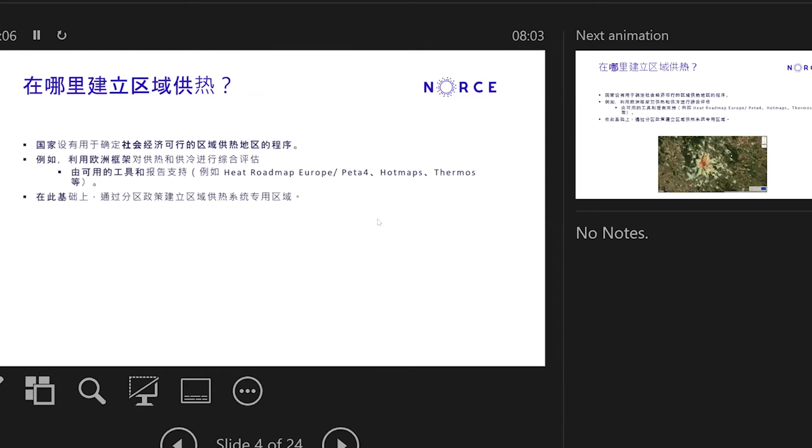So where should we have district heating? I think it's important to establish already in a national procedure the overall purpose of district heating. If you take the Danish experience as a point of departure, it's quite clear that it's based on a principle of socioeconomic viability.

What you can do is establish some sort of national or regional procedure where you start to map and identify the areas where the potential for district heating exists. An important parameter here is the heat demand and heat density, or what we also call linear heat density. Within the last maybe 10 years, different tools have been developed in Europe and Denmark that are able to do this.

I'm sure this has also maybe already been developed in China, or can be developed, where you have IT tools that map the heat demand, and thereby identify the areas with good potential for district heating—meaning urban areas where people live close together, giving you a high linear heat density.

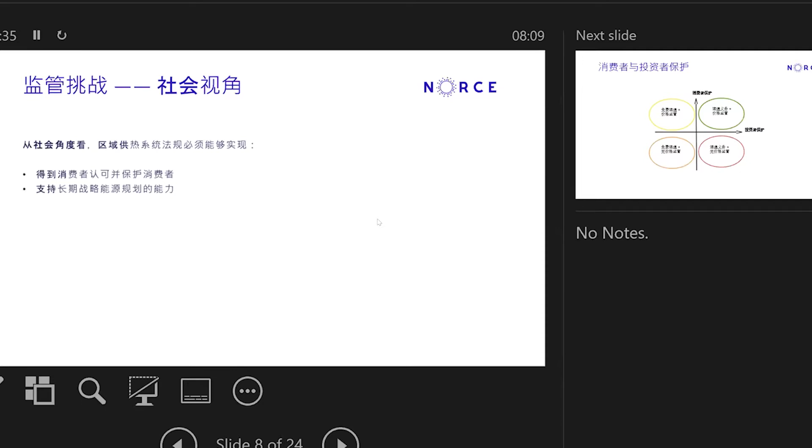So in a way, you can say we have two challenges, or two concerns to balance. On the one hand, consumer acceptance, and on the other hand, investor protection. The investor needs to know his investment is viable, so he needs some certainty about the demand and the willingness of people to connect to the system. And on the other hand, you have the consumers who should not be, you could say, victims of this monopoly.

For example, in Europe we have seen examples where monopolies increase the prices too much because they have this monopoly power. One way this can be balanced, as has happened in Denmark, is to place yourself in this top right corner of the regulation, where on the one hand you establish an obligation to connect within the district heating areas. This means that households in these areas should be connected to district heating.

By this, you protect the investor and make sure the investment is viable, because it secures the demand. But by this, of course, you create this strong monopoly. So on the other hand, to balance this, it is important to have an effective and strong price control, and also, as I will address later, some ownership structures that enable this control of the company.

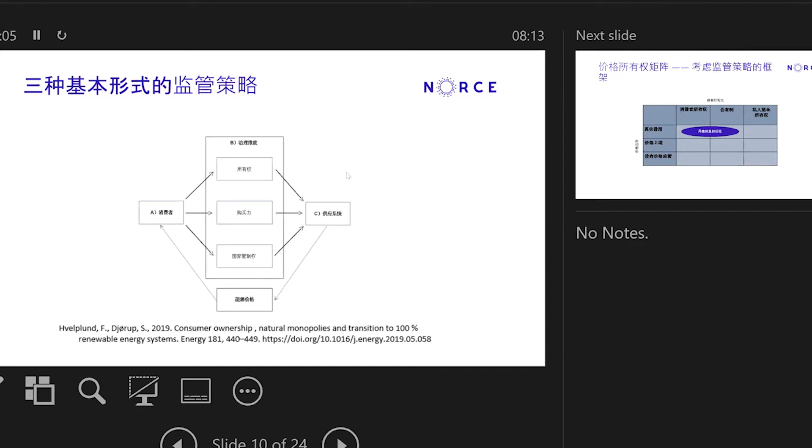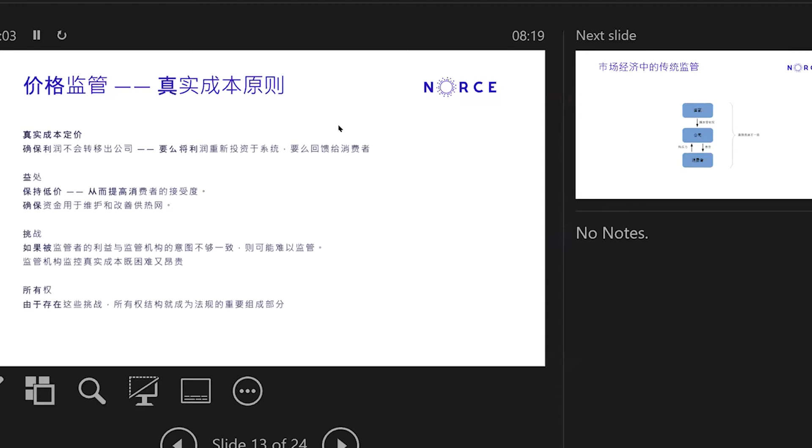This kind of basic challenge that we see across different price regulation leads to the question of ownership. The interesting part about ownership is that by changing ownership structures, you also change interest and incentives, aligning the interest between different parties in society.

So in a normal market economy, you have this conflict of interest, but this is then controlled. The company is controlled partly by state regulation and also by the consumer's buying power, meaning the consumers have a free choice. If they think the price is too high, they can choose another option, and thereby they have some sort of buying power or market control over the company.

The problem with district heating and the monopoly situation is that this consumer buying power is disabled, because we have a monopoly situation, and that's why this principle doesn't really work.

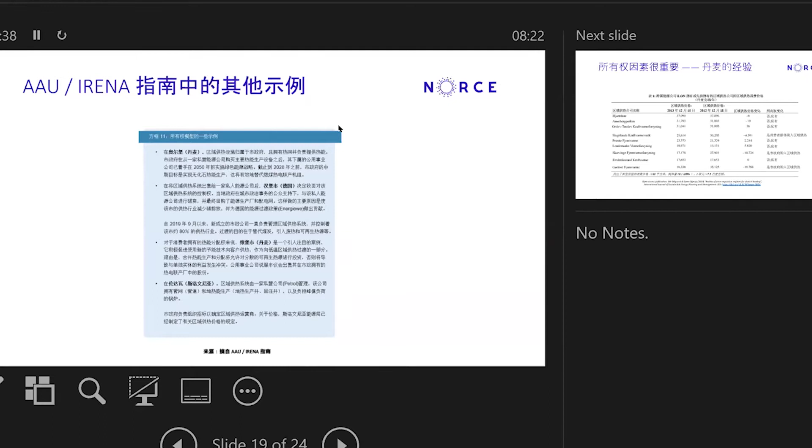What we then saw was that when this ownership was changed, either to municipal ownership or to consumer ownership, we saw an immediate effect on prices and large efficiency gains.

This indicates the same thing I said before from a theoretical angle, that it is difficult to have price regulation if you have a company that's not willing to collaborate, because the company has the real information about the true cost of its operation. So in the Danish case, it's been difficult for the regulatory power to control the prices if the company is not willing to collaborate.

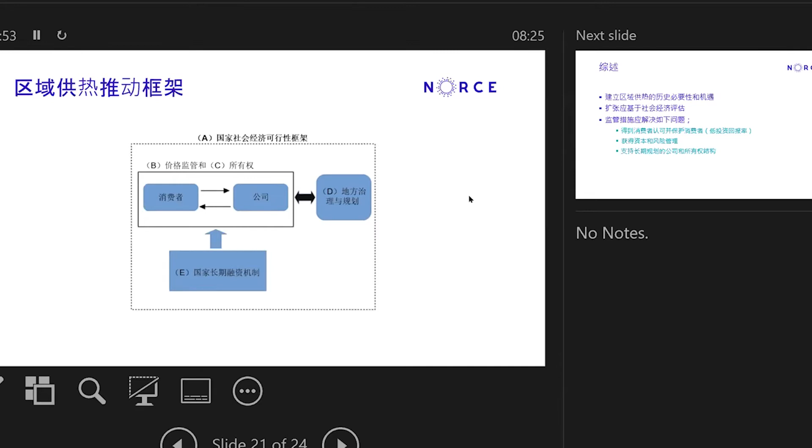So to sum up, you can say that the opportunity and potential of district heating in these years is very high, and it's important that district heating has a societal purpose, a societal aim. When implementing it, what is important is to control the monopoly, to make sure that you have a company that's willing to collaborate. That was the final slide from my side. Thank you.

Next, please, Viviana. As I said, the treaty operates based on the EU acquis. When it comes to heating and cooling, the EU acquis currently in place in the EU and the Energy Community integrates the Energy Efficiency Directive, the Renewable Energy Directive, the Governance Regulation from the Clean Energy Package, and also the big picture strategy on energy system integration.

Sometimes there is a time lag between the acquis in force in the EU and the adoption of the acquis in the Energy Community, but not more than maybe 2 years. So in the EU now, you have an amended Energy Efficiency Directive with a clear target of energy efficiency by 2030. In the Energy Community, we are yet to adopt that, but we still operate under the 2020 target.

For that, it's important to remember the district heating and heating and cooling obligation under that directive. I'll speak about it in more detail in the next slide, but for now, let's stay on the bigger picture.

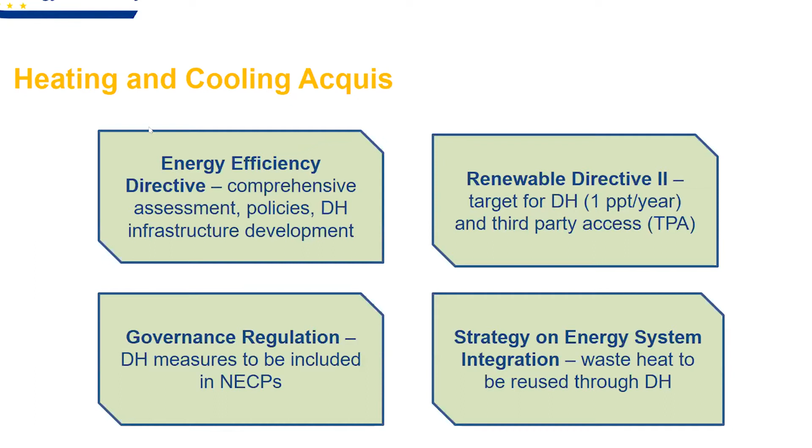I think Soren already brought in some of the obligations from the Energy Efficiency Directive when it regards heating and cooling. This is interesting because, as any directive, it has to be transposed into national legislation. So the directive prescribes the big picture, but each country should transpose it, taking into account the national context.

Nevertheless, the directive itself requires that each country prepares a comprehensive assessment of the potential for the application of high-efficiency cogeneration — high efficiency, I'm stressing that — and efficient district heating and cooling. There are annexes which define the high-efficiency indicators, and district heating and cooling is described as integrated renewables and waste in the system itself, so it also looks at supply and transportation.

It also requires that countries adopt policies to encourage, taking into account at local and national or regional level, the potential. You remember Soren said you have to do this mapping of where you have more potential. Wherever you have this potential, whenever there's a new residential or industrial development, you have to make a cost-benefit analysis of whether you could supply heating and cooling through either a cogeneration plant or an efficient heating and cooling system.

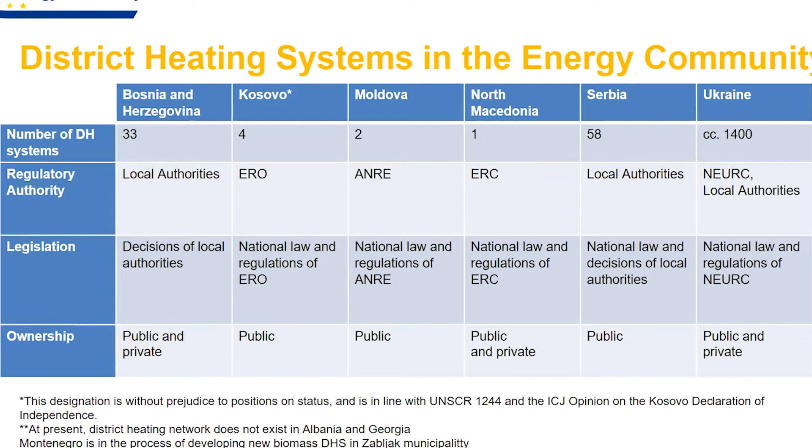I will just mention the example of Bosnia and Herzegovina, where in recent years they have developed biomass-based district heating companies in the form of public-private partnerships.

Some of the common characteristics of district heating systems in the energy community are that district heating is regarded as a service of public interest, and that it is provided by vertically integrated undertakings, meaning that production, distribution, and supply are merged in one company. The exception is North Macedonia, where there is an obligation to separate these activities into different companies. Basically, we can say that there is no competition in district heating in the energy community contracting parties.

What is also one of the common characteristics, and is maybe probably the biggest problem for the development and investments in district heating, is that tariffs are regulated and they do not reflect the true costs of production or these activities. I would also say that energy community contracting parties do not have pricing of CO2 emissions. This is expected to come to our contracting parties this year or next, in the upcoming period, and this will have to bring much higher prices.

Now I'm moving to the means of how to integrate renewables and waste heat in district heating companies. Basically, either district heating companies develop by themselves, or third parties independently produce heat from renewable sources and have the right to inject this heat into the distribution network. This is the so-called third-party access.

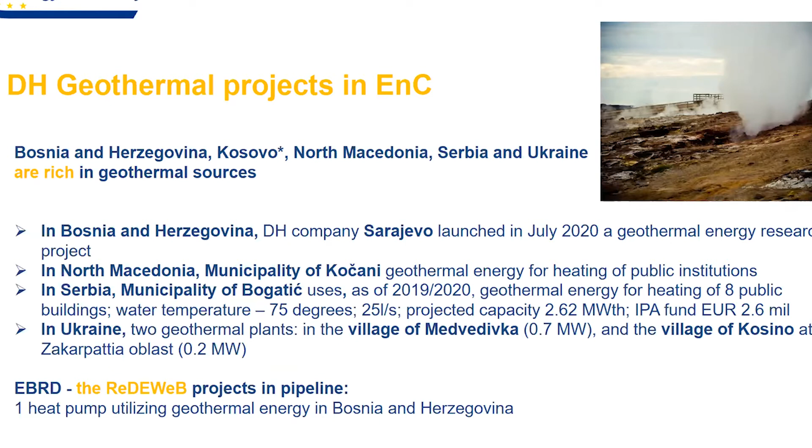We have good cooperation with EBRD, which has a separate program for renewable district heating and district energy for the Western Balkans, and there are numerous projects in the pipeline that should develop geothermal and solar thermal projects.

Now the second means of introducing renewable heat and waste heat into district heating: third-party access, where third parties produce renewable heat and have the right to inject it into the district heating network.

Since in our contracting parties there are no practical examples of this, I will shortly tell you about some theoretical models. In the single buyer model, the district heating company purchases renewable heat from a third party and remains the only supplier to consumers. In the network access model, the district heating company does not purchase this heat, and the third party is at the same time the supplier.

As far as I am aware, there are no practical examples of this second model either in European Union member states or in contracting parties. Regarding whether district heating companies have to provide this access: third-party access can be voluntary or mandatory, and depending on whether predefined rules exist in the regulation of a country, it can be regulated or negotiated, meaning the district heating company has freedom to negotiate with the third party on terms and conditions of access.

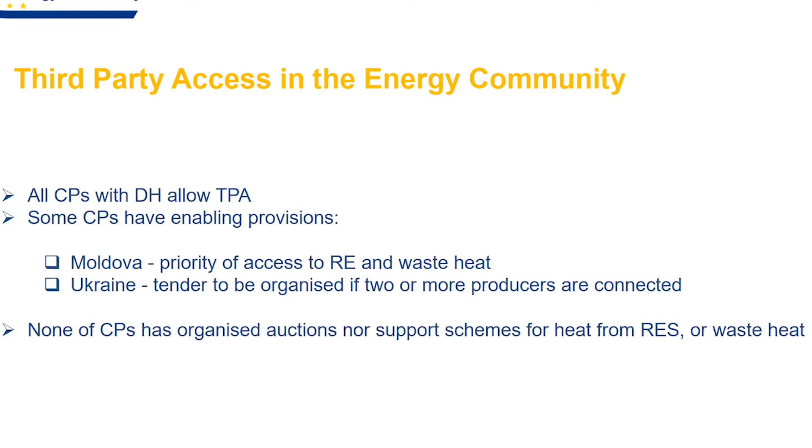Concerning third-party access in the energy community, all contracting parties have allowed third-party access, which is good and important. Some have enabling provisions—Moldova legislation gives priority of access to renewable and waste heat, and Ukraine's law on heat supply says a tender needs to be organized if two or more producers are connected to the distribution network. However, none of our contracting parties really organize auctions for renewable heat, or have a support scheme at the national or local level for heat produced from renewable and waste heat.

Some conclusions: integration of renewable and waste heat in district heating companies is in an early phase. In the upcoming period we expect to work a lot on defining national policy, but also to support local authorities. As Violeta said before, everything starts with a comprehensive assessment to see where the potential for district heating is and where we can build this infrastructure.

We support the solution that independent bodies, equipped with necessary knowledge, actually regulate and monitor district heating rather than local authorities. Human capacity is usually lacking, so technical assistance is needed for local and national authorities to define this enabling framework, define support schemes, and organize auctions for renewable and waste heat. Thank you for your attention. I hope I didn't take too much time.

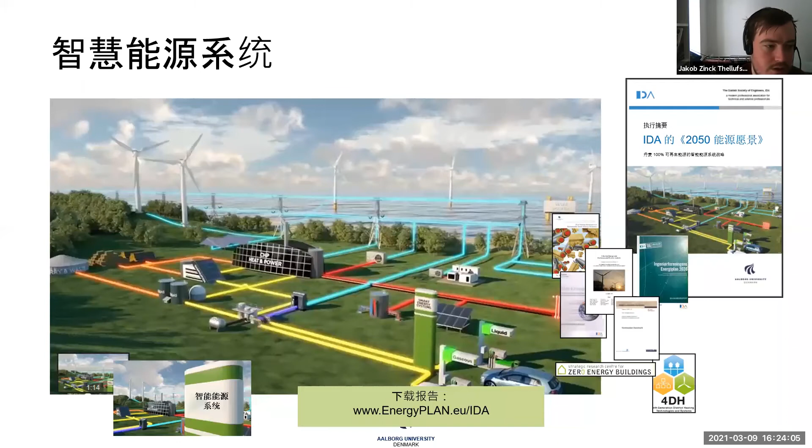My agenda: I'll talk a little about the current status of district heating and its generations, then move into low temperature district heating, the technical aspects, and why it's a good idea to move towards low energy. Then I'll show an example, a case from Denmark, though the key concepts can be applied anywhere in the world and can be very beneficial.

This is mostly about Europe, where there's a lot of district heating in many countries, but also many countries without it. It also applies to China, which has a lot of district heating in certain areas, while in others, due to climate or other factors, there's little or none. There are different consequences depending on when the heating season is, and whether heating also supplies domestic hot water or that has to be made separately.

All these things play together. First, there's a challenge not only to develop district heating, but in some countries a challenge to build out completely new district heating areas. This could also be the case in Asia, where some areas may need to expand with district heating.

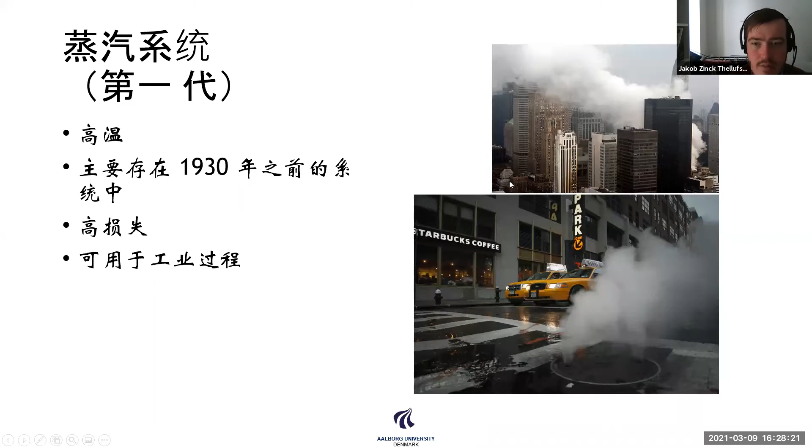Then the second generation, built around the 1930s to the 1980s, is also still operating in many places in the world. Here we now have high pressure - pressurized water running around with over 100 degrees in our system. But again, we're talking about high temperatures, and you also have to pressurize the water, so we have some efficiency losses in such a second generation system. In many Eastern European countries or Russia, this has been a common solution for handling district heating.

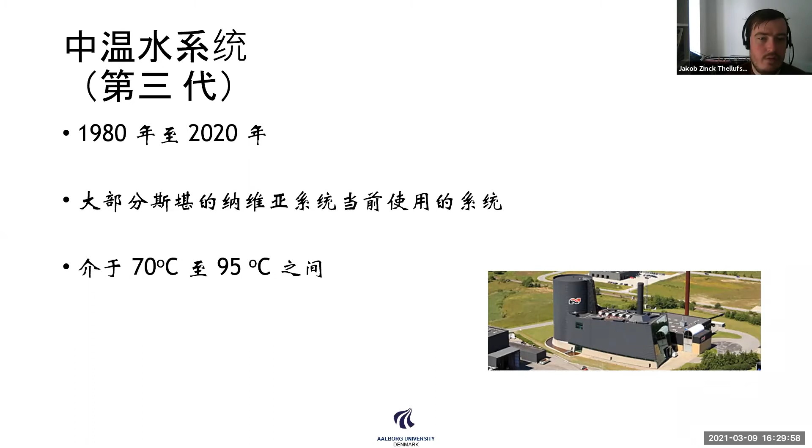But what we need to do - for some it might be moving to third generation, but overall for everyone, I'd say what we need to do is move towards fourth generation district heating. By going to fourth generation, we're lowering supply and return temperature - that's some of the key things - and increasing energy efficiency. So we need to lower supply, lower return temperature. By doing that, we gain multiple benefits. First, we gain less loss in our system - we reduce our losses.

Second, we get a number of new supply technologies we can potentially use. When we look at the first two generations, the only option was really thermal plants, boilers, power plants, combined heat and power plants delivering heat into our system, because we needed to deliver it at such high temperature. By reducing the temperature, in a third generation system we got the option to have surplus heating from industry, maybe CHP from biomass, and solar heating. So we opened up options by lowering the temperature. Now, if we can lower it even more, we can utilize heat pumps, geothermal heat, and excess heat from supermarkets, low-grade industry, or data centers.

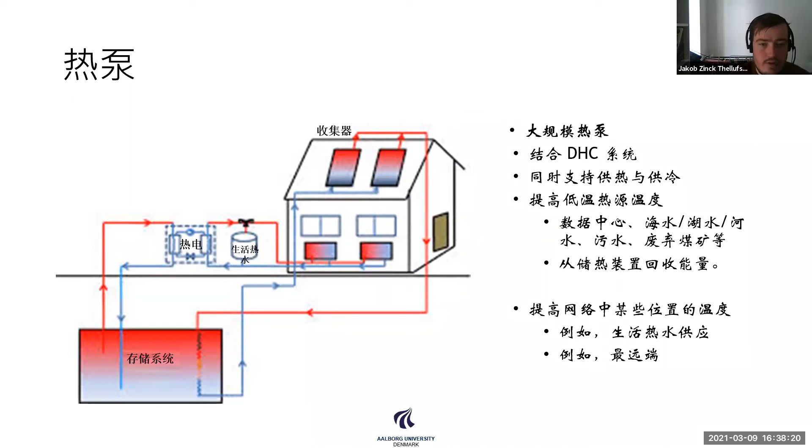Else, when we talk about renewables in our grid, we talk about technology like geothermal, where we can find hot sources in the underground that we can include into our heating system, either directly if we're lucky and the temperature close to the surface is high enough, or like in many other project examples right now, using heat pumps. So the geothermal source will be the medium for boosting the temperature up, as will happen in a heat pump.

Another option for renewable that's very obvious is using the sun. So instead of using solar PV to create electricity, we can also introduce solar thermal, where we have solar panels that capture heat from the sun and use that to heat our heating system. This is also relevant in countries where it might be cold — these examples here are from Denmark, and they are actually operating very well in a Danish context, and we are not necessarily the warmest or most sunny country in the world. So there are actually some good options for this globally as well.

Now, when we have our renewables, we can use a bunch of different thermal storages. And all of these, with low or lower temperature, can use these kinds of seasonal storages. So while we get all these different renewable sources into our system — geothermal, solar, waste heat from industry, excess heat from the supermarket — all of this can be stored seasonally, because a lot of these things happen when we have a lot of sun in the summer, or a lot of excess heat from industry in the summer, but we don't have the demand because it's too warm, so it's not cold enough for us to have heating demands.

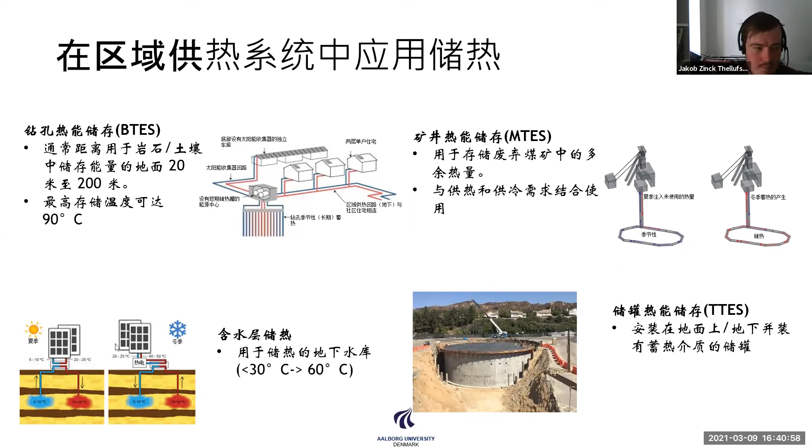So to show and illustrate these kinds of technologies in the system, I would like to talk here at the end about a plan for 4th generation district heating in Denmark, in the city of Aalborg, that we've been working on about a year ago. We try to estimate how we can actually use 4th generation district heating, and what the advantages are of doing this in terms of technologies and all things considered.

Currently, the Aalborg system is the 3rd generation district heating, and it looks something like this. It is very much coal based. We are supplying by a big central coal power station, and this also delivers a lot of heating to industry, and then we have a lot of heating that this CHP plant delivers, and the main heating comes from this, and excess heat mainly from industry. So this is the current system in Aalborg.

And what we want to do is transition this into renewable energy. So we limited biomass use. We included transport, both local and global, and we use the industrial demand related to inhabitants. This is because Aalborg has a very big cement industry, with potential for a lot of excess heat that we will use in the plant, but it also has a lot of coal and fuel consumption. If Aalborg had to consider this, the only thing we would have to do in the plan was basically transitioning this plant.

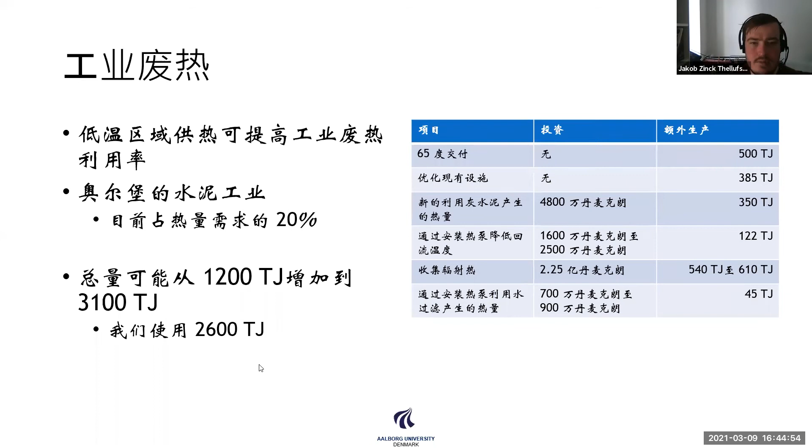And this potential, some of it will already be available today. We don't necessarily have to build 4th generation district heating to get to all of it. Then we made an analysis and said, well, around 2,600 terajoules is accessible for the system. So this is what we will use in the analysis.

Finally, we have heat pumps and geothermal, and here we estimate 100 megawatts. These can either be supplied by geothermal or seawater, because there's a river close to Aalborg. And we have 20 megawatts of heat pumps running on this waste heat from industry, helping to boost the temperature a little bit. And we have a 40 gigawatt hour seasonal storage in our system.

And this means that our district heating supply changes from being predominantly based on the CHP, the combined heat and power plant, and instead goes into being predominantly produced by waste heat, waste incineration, and heat pumps. So those are the main technologies now supplying our future system based on 4th generation. We are actually almost completely free of CHP, and completely free of coal in our system, which not only benefits the CO2 emissions, but also benefits a lot the particle matter and the air pollution potentially. So we are also dealing with those things in the same manner.

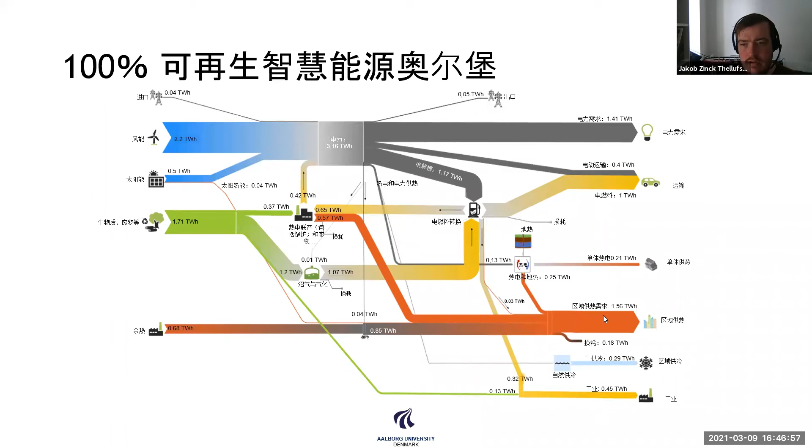So overall, we shift completely to this smart energy system in Aalborg instead. And now if you look at the heating system, as I said, we have a lot more waste heat. We have almost nothing from CHP, just a little bit, but it's based on gas now instead of coal. And this gas is also partly renewably produced from biogas or from gasification. And we have some coming from heat pumps and geothermal, so we have electricity being utilized here to supply, but predominantly this is the case.

Finally, we did a number of analyses just to illustrate what happens if we have no low temperature district heating. This is the whole point. If we cannot get to low temperature district heating, what happens?

First, we looked at what if we had our system but with 3rd generation district heating. Now we couldn't operate our heat pumps as efficiently, we couldn't have access to the same kind of thermal storages, our heat pumps weren't as efficient, and there were more losses in our system.

This actually meant we ended up in a situation where it costs a little more, because we needed more boilers invested, more CHP plants potentially, more heat pumps in our system, to supply the efficiency gains lost from going to 4th generation. We saved a little on equipment and district heating retrofitting, but the system cost of a 4th generation network is not necessarily more expensive over a long period than 3rd generation—it's just more insulated, so it's a little extra cost, but these savings didn't outweigh the extra cost of having to supply more heat.

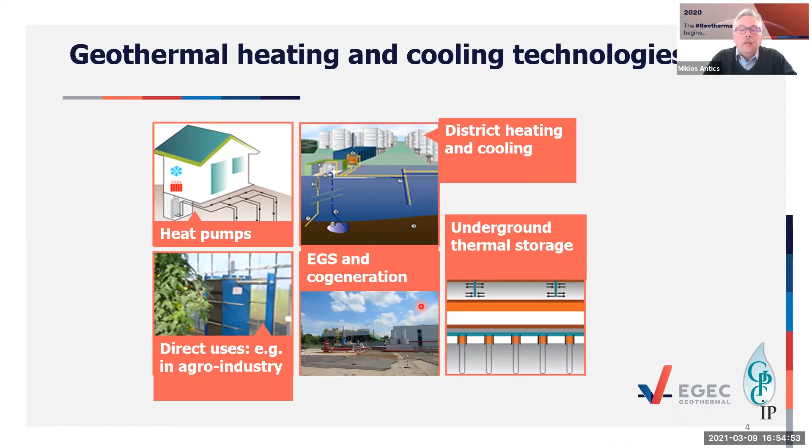Geothermal heating and cooling technologies are available since a long time. My speaker before has given you a great outline of all the technologies available. I just want to recapitulate that geothermal energy, you can harness it by deploying heat pumps, deep geothermal energy systems, district heating and cooling like in the Paris area, by direct uses in agro-industry, which are largely populated in the Netherlands. We can use underground thermal energy storage, available everywhere, especially in Netherlands, Germany, Switzerland and Sweden. And then you have EGS, enhanced geothermal system or engineered geothermal system. There's only one system working now in Europe, in Soultz-sous-Forêts in France, where you can produce electricity and heat combined, heating and power.

Well, geothermal, I will give you some key figures from the market report published in 2019. This is an activity of EGEC, which comes out every 2 years. In 2019 we have 130 geothermal plants for electricity with a capacity factor of 84%. Just bear in mind that geothermal is available 24/7, 365 days a year. Then we have passed the 2 gigawatt thermal threshold for geothermal heating systems. We have more than 300 geothermal district heating systems and greenhouses, and more than 2 million geothermal heat pumps in Europe at the end of 2019.

Well, in 2019, geothermal lithium extraction has also started at the pilot scheme in Europe. And here you can see a map with all the deep geothermal district heating and cooling in megawatts installed by country, and the electricity installed in Europe. Of course, the leading countries are Iceland and Turkey, which have high temperature resources, followed for electricity by Italy. But we should not forget leading countries on continental Europe, France and Germany.

Well, here is a map with the distribution of all European countries with respect to number of district heating and cooling installations all over Europe. You can see that France is leading by about 60 installations in operation today, and there are 40 more planned in the next 5 years. New grids which are planned for 2025, taking into account about 20 kilometers per grid, we are looking at 4,000 kilometers of geothermal district heating.

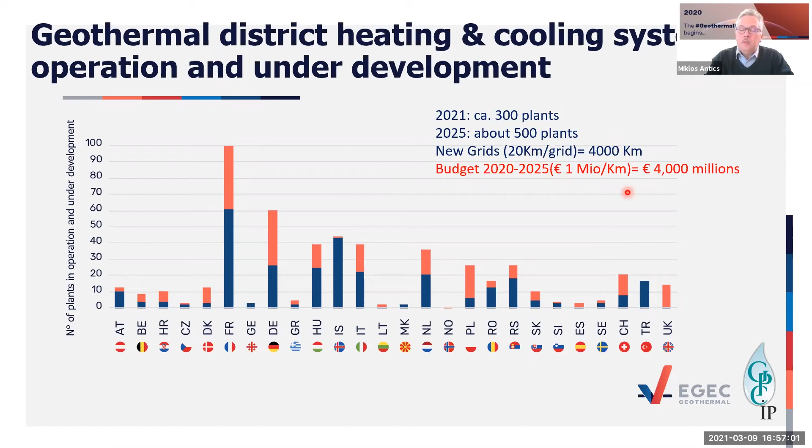Well, the budget to be spent for new geothermal district operations is 4,000 million euros, 4 billion euros. So it's a big business all over Europe. And why is it? Because more than 25% of the European Union population lives in areas directly suitable for geothermal district heating. Here you can see a map published by the GeoDH project from the European Technological Innovation Deep Geothermal Project, where you can see all the capacities installed all over Europe for district heating.

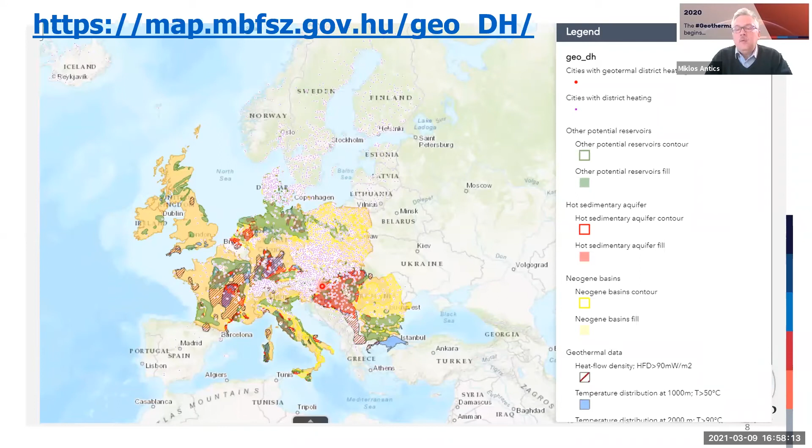This is another map realized within the same project, where it maps the potential, the reservoir, the type of reservoir against district heating systems. So we can see a very good match of existing district heating systems, plotted here as small pink dots. You can see a large number of district heating systems, especially in Central and Eastern Europe, which could be very well matched with the hot sedimentary aquifers, located in quite high density here. So there is an enormous potential to be developed, and it is all related to the reservoir conditions.

We also have a number of geothermal district heating systems located in the northern part of Paris, where the reservoir is not as hot. Temperatures vary here in the north from 60 to 70 degrees. In the south, we vary from 65 to 80 degrees, and in the east, we have higher temperatures than 80 degrees in some doublets.

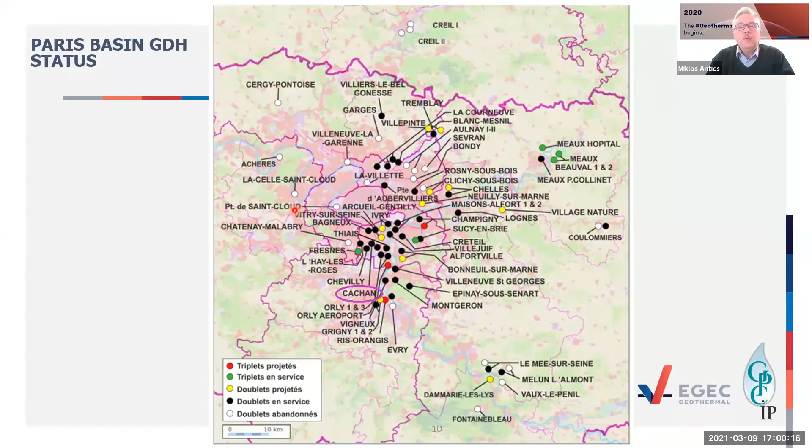How a geothermal doublet operates, you have seen and heard it all over the talks today. We do have a doublet, a production well and an injection well, both drilled from the same platform. In the production well, these are deviated to provide a certain distance from the impact of the reservoir in order to avoid thermal breakthrough. Then we have a production well, a heat exchanger, a heat plant, and an injection well where the cold water is reinjected.

Then we have a distribution grid with substations, and water is circulated all over, recovered and reinjected, recovered and recirculated in the secondary grid. So we have a geothermal loop, and then we have the district heating loop. I will show you later.

Just a bit of historical milestones of the Paris Basin development. We have had the births, as we call it, in the years 1969 to 1980, where we have the first geothermal doublet in 1969. Then we had the period of infantile disease from 1980 to 1990, where we had 50 doublets completed. We had several thermochemical damages because the water we produce in the Paris area is hostile, a water which contains H2S and CO2. It's with a low pH, and it's a hostile chemistry for corrosion and scaling. Then we had problems with electro-submersible pumps, poor management, and lots of problems with the economics. Of course, the Trias was already targeted in that period, that deeper reservoir, but they all failed.

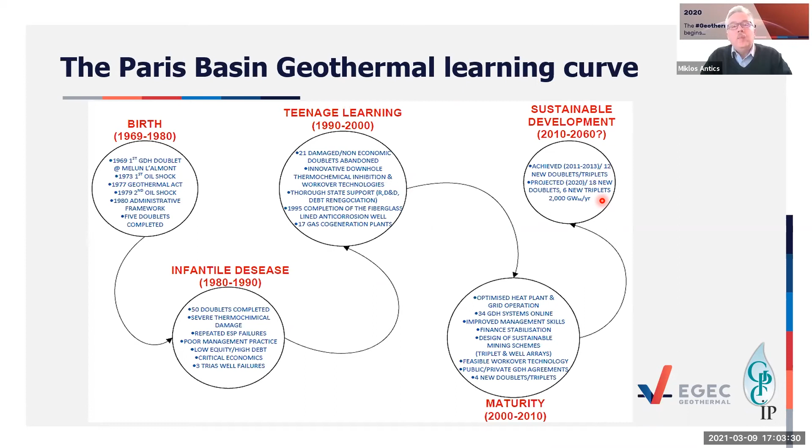Of course, we deploy now modern, integrated reservoir engineering approaches in order to assess, plan, and design our doublets. This is a typical heat load curve where the target is to cover 66% of the district heating need with geothermal. You can see that 56% geothermal alone can cover it.

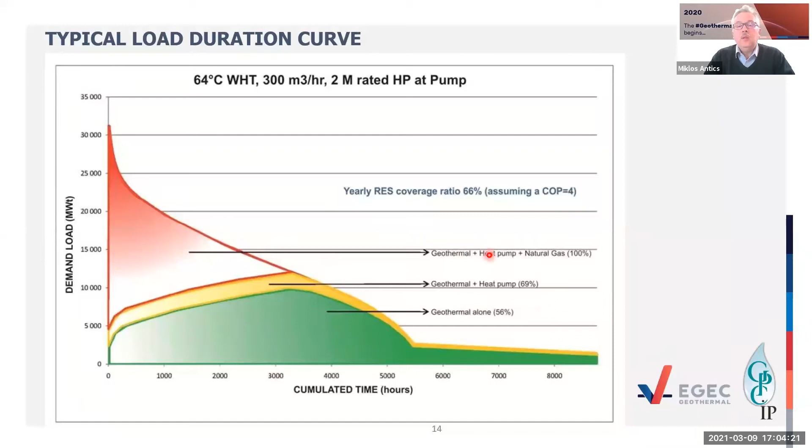This is an example of a district heating doublet with 300 cubic meters an hour at 64 degrees Celsius, with a 2 megawatt rated heat pump. With the heat pump on top, we can cover 69%, and the rest is covered during a reduced number of hours by the natural gas. Most of the systems operate like that.

As I said, this is an example of well architectures. All the wells are drilled from the same platform. We have a distance of 10 meters between the wellheads. We distinguish the injection well from the production well by the fact that the production well has a pumping chamber, which is a larger diameter, in order to install a large capacity submersible pump.

We have moved in 2018 to new well architectures. We have achieved the world's first sub-horizontal doublet in designing and planning a doublet on a site which has been producing geothermal energy since 1984.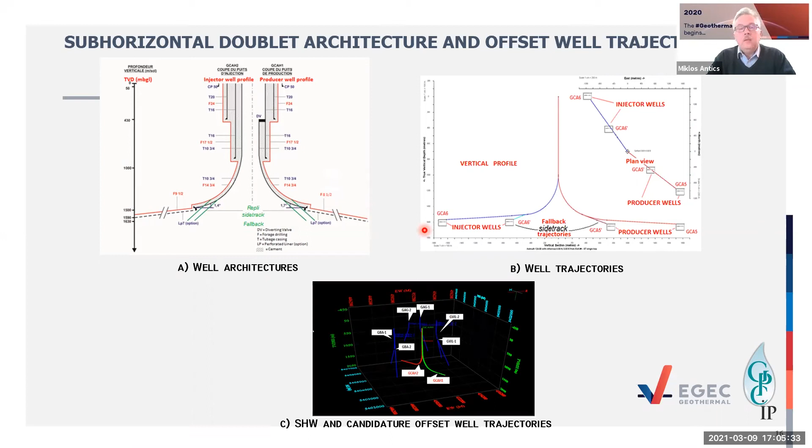These doublets, there were two doublets in place which were producing a flow rate of 350 cubic meters an hour, and they were replaced by one single doublet which has a new capacity of 450 cubic meters an hour by drilling sub-horizontal drains crossing all the layers of the reservoir over 1 kilometer. These technologies are now proven, commissioned for 2 years now, and working pretty well.

As I said, the water is corrosive and has lots of problems. For that, we have designed fiberglass lined geothermal wells, which use a steel propping casing inserted with a fiberglass liner, with free suspension on the bottom and compression on the top. The advantage of this system is that the geothermal water does not enter in contact with the steel casing, so it's a low maintenance well, and it does not need a chemical injection line. Like in the figure here, all the wells which are steel cased benefit from a chemical injection line to inject an inhibitor in order to protect the well integrity for a long period of time.

And now these lines became intelligent. We have fiber optics included in the line and downhole monitoring gauges in order to monitor reservoir properties and well integrity. So technology, the smart well concept, has been evaluated in real time.

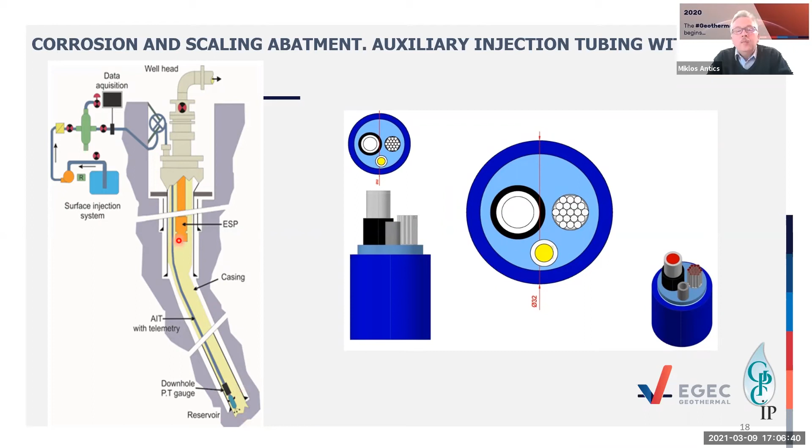It's not so easy working in urbanized areas, but these doublets, most of them, provide heating to 5 to 10,000 inhabitants all over. Well design and monitoring, of course, we have to monitor the loop, and we have to monitor the geothermal district heating grid as well. So all is well synchronized and well trimmed, and all the grid parameters are adapted accordingly in order to assure monitoring.

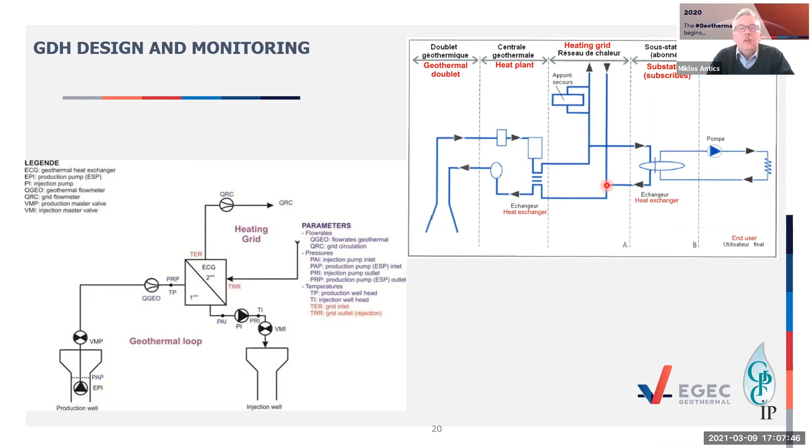These are the design features of the geothermal loop, showing you the main components, as I explained before: the electrosubmersible pump, the filters, the heat exchanger, and the injection pump. All is variable frequency drive, and it's controlled by the outside temperature.

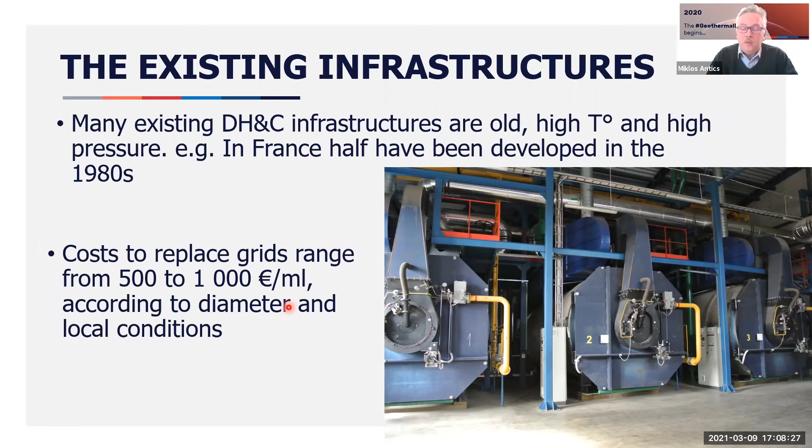Well, where we came from, renovation. Before we had this, like this is a photo taken in my hometown in Oradea, and these are gas boilers, and we moved from gas boilers, replacing the grids with a large cost of capital investment, about 1,000 euros a meter.

What is the problem if we talk about economics? The capital, it's very capital intensive. We have to spend more than €1 million per kilometer in order to develop new district heating.

Well, new district heating systems are easy to achieve in some places, or much more difficult, but they are already integrated in the environment. Existing district heating systems are already obsolete, so most of the time they need to be entirely renovated and converted to low temperature geothermal systems.

Especially in the Central Eastern Europe countries, we have insufficient, unpredictable revenues, high costs, high commercial risk, limited access to capital, and degraded assets. It is about the same in France. When you have to renovate an old grid, you have the same problem.

District cooling networks are more and more popular, and they are developing, and they are long-term investments, integrated in such so-called smart grid systems. And then, well, most of the case, as we are very capital intensive, there is insufficient subsidy, and in most of the cases, not enough carbon pricing for decarbonizing.

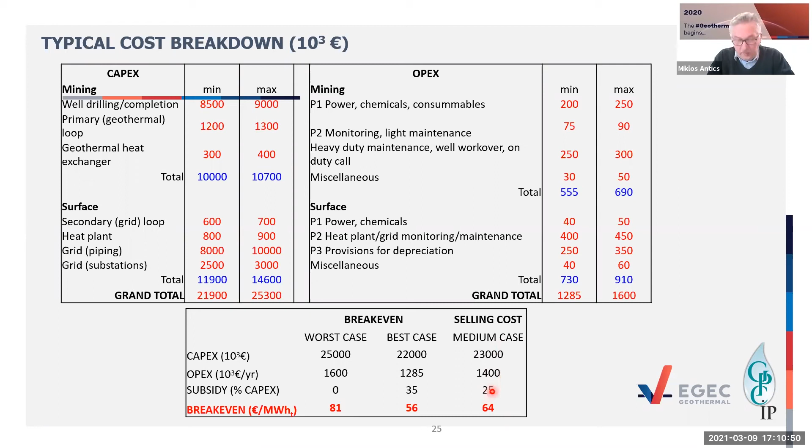Well, you can see that for the worst case, we have to invest 25 million euros in a new grid. We are speaking about 1,600,000 euros of OPEX. If we have no subsidies, we end up with a break-even price of 81 euros a megawatt hour. If we have a medium case where we have to invest 23 million euros, and then we have to spend 1,400,000 for operating, and we have 25% subsidy, then we have a break-even of 64 euros.

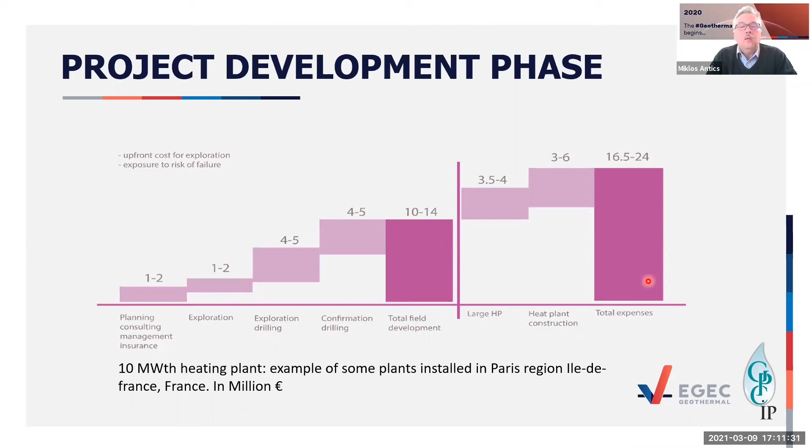This is a breakdown of capital expenditure before commissioning the plant, showing how much money you need to spend over time until it comes online. We have the same figures, but distributed on a scale.

We have a national fund which contributes about 20% in subsidies for geothermal district heating, which is maintained, along with a system of energy efficiency certificates. Crowdfunding has also been deployed in new projects and proved attractive in one project in France, which was very well received because it involves cities and local authorities in the concept.

This is a bit about risk and failure/success criteria. This depends very much on the well - geothermal is no secret. We have the flow rate and temperature we need to obtain, provided we have the right parameters for flow rate and higher temperatures.

Then we are all about success, and if we are very below the required parameters, we are a failure. We do have partial success and partial failure cases, which are related also to the economic figures given below: the capex, the opex, the selling price, and the internal rate of return.

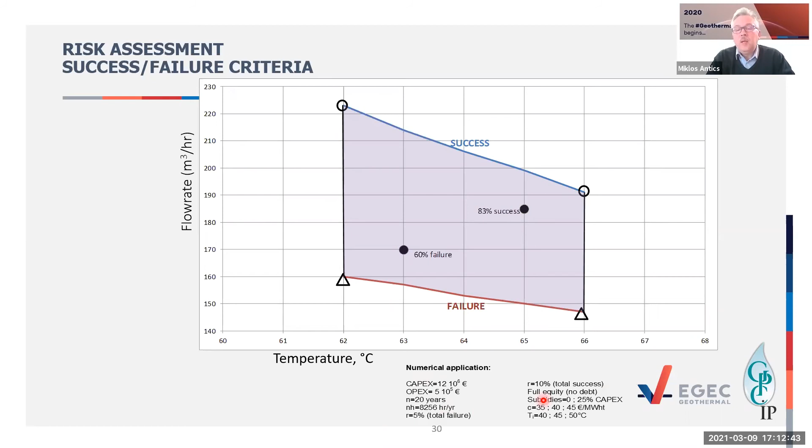Of course, we know the Paris Basin pretty well from a long time, more than 40 years now, but we still have challenges to address. We have to go on sectoral lithostratigraphic correlation to mitigate mining risk, reprocess existing seismic lines, go to innovative well architectures as I showed you, then explore and site new wells at deeper aquifers to obtain higher temperatures and provide energy to cities which already need more district heating.

The biggest problem now is having an eligible drill site because of urbanization. It is very difficult now to have 3,000 or 4,000 square meters available to set up a drilling project.

Continuous innovation brings success to geothermal district heating in France and everywhere. I would conclude by saying that geothermal district heating has been proven renewable, sustainable, achievable and realistic. This is one of the future energy sources which has to be integrated more and more in district heating and decarbonization of heating and cooling in Europe and all over the world. Thank you very much.

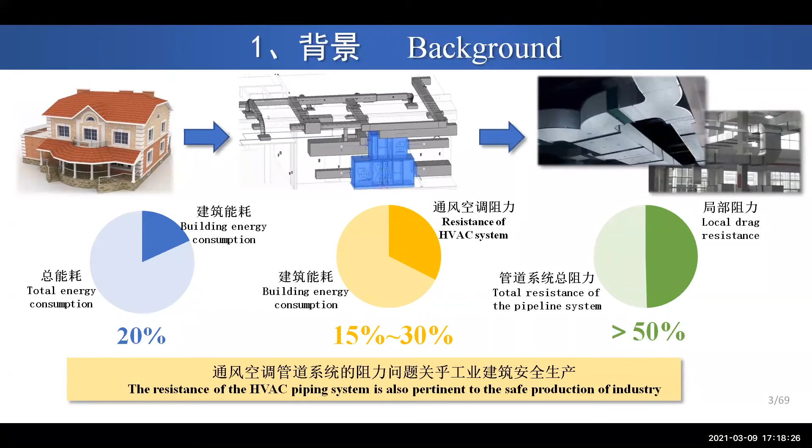But again, the local drag resistance - that means the transmission system - contributes more than 50%. That means the drag resistance is very important. Additionally, the resistance of the HVAC piping system is also related to safe production for the industry. So it's a very important problem.

Look here - the HVAC ducts look like a maze, very complicated, so a lot of energy will be consumed. Generally speaking, bad design, bad manufacture, bad installation, and finally bad operation normally contribute a lot to the energy consumption.

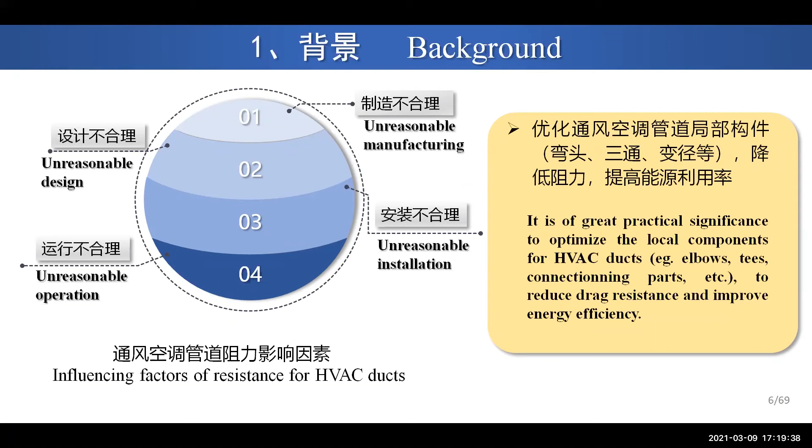So what we should do, from the energy saving prospect, is try to find our ways, find some new technology to reduce or decrease the energy consumption from the HVAC piping systems.

Generally speaking, there are 4 methods to reduce the piping resistance: the turning vane drag reduction, rectifier drag reduction, duct arc surface changes. We can change the duct surface to achieve drag reduction, and other types of drag reduction.

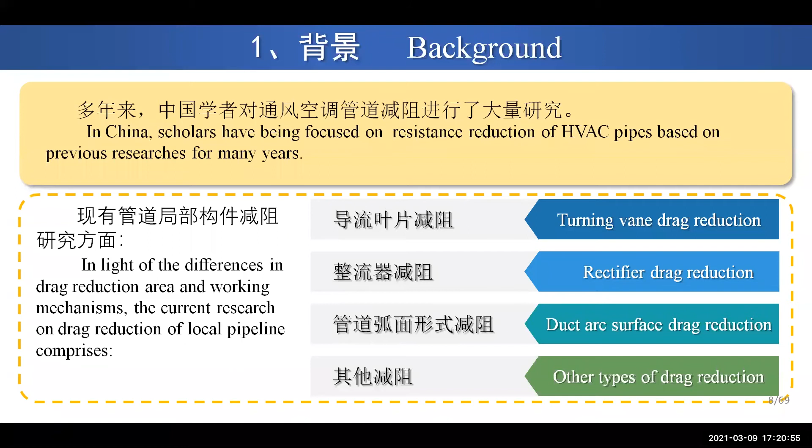In China, we have been focused on resistance reduction for many years, over 20 years. This is the turning vane drag reduction method, which is very widely used. The rectifier drag reduction is also commonly used in HVAC systems.

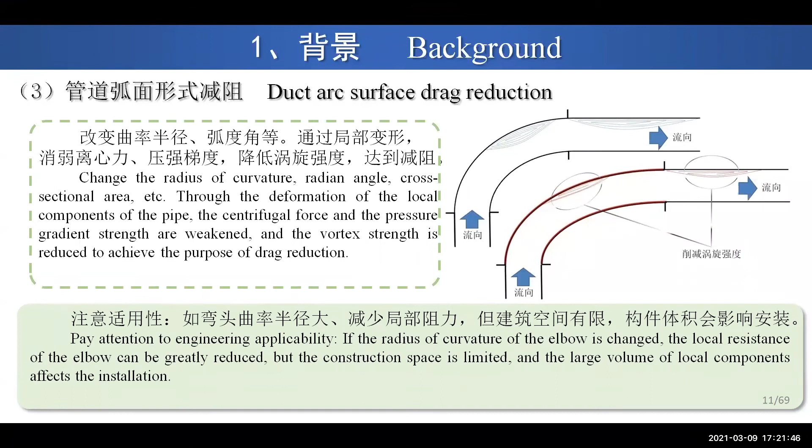This is a very important way to reduce the piping or duct resistance. We can change the surface shape. For example, normally the duct can be made in a circular way or rectangular way, and we can change these shapes. More importantly, we can change components such as the elbows or T-junctions. This is another type of drag reduction, where we can use a drag-reducing agent.

That's the background. As I mentioned earlier, our teams have been focused on research on drag reduction for over 20 years.

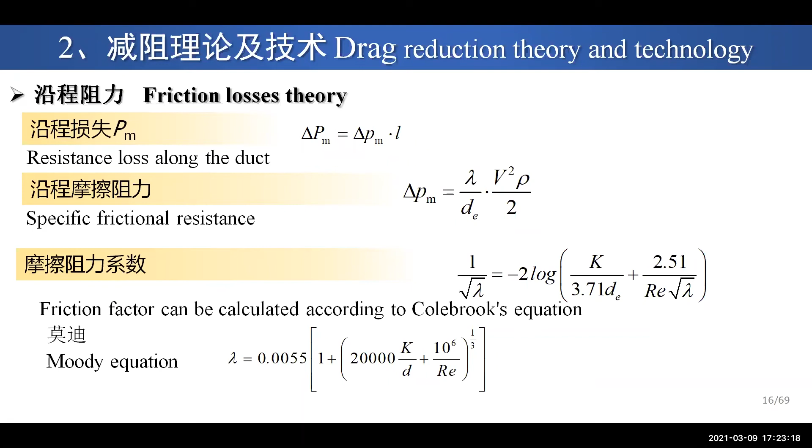This is a friction losses theory, because today most people are focused on the strategy. This is just a short introduction - this is a drag reduction theory.

The local resistance coefficient for HVAC components is used to evaluate the resistance reduction effectiveness. So we can use the local resistance coefficient to evaluate whether the system is good or not.

This energy dissipation is caused by vortex. The essence of local component resistance reduction is to reduce energy dissipation caused by the air vortex. That means controlling the airflow vortex means reducing the resistance and power consumption.

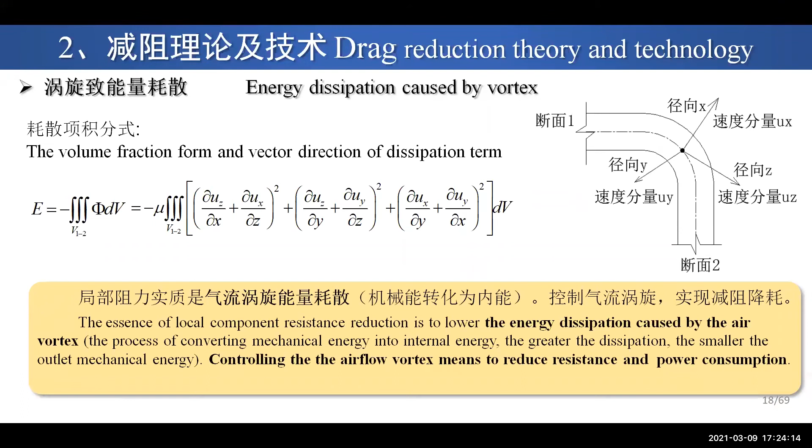But there are many factors that influence the resistance. For example, here is the air velocity - the air velocity has a direct effect on the local resistance.

However, for HVAC systems - heating, ventilation, and air conditioning systems - normally the air velocity is much less than 15 meters per second, normally 5 to 10 meters per second. That means the resistance is always changing with the air velocity.

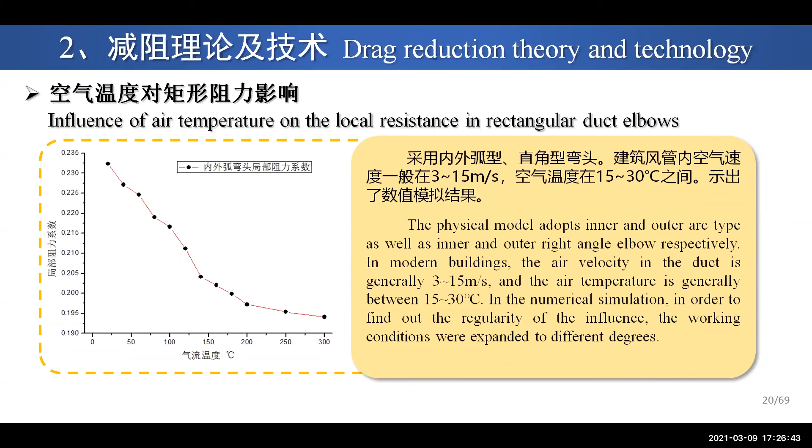We can take the elbows as an example - different aspect ratios can have a different influence on the resistance.

From our findings, if the aspect ratio can be kept less than 4, then the resistance will be low, or the resistance will be quite good. If the aspect ratio is more than 4, then the resistance will increase rapidly.

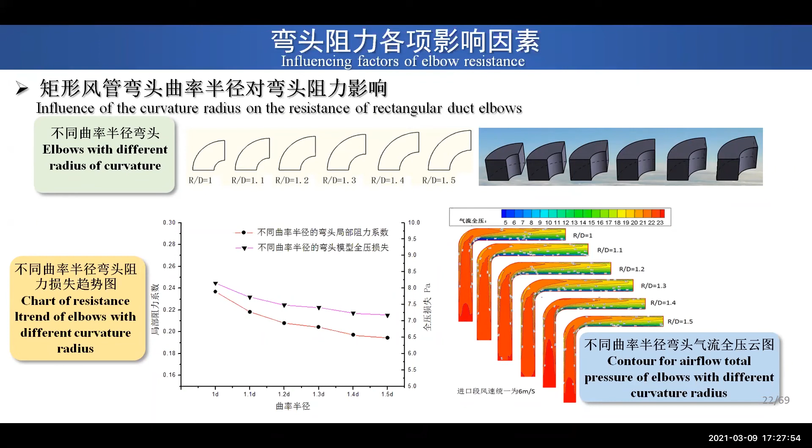This is the curvature radius and its influence on the resistance. Generally speaking, inside the tube or duct, the airflow is not uniform, so we try to keep the airflow uniform to reduce the resistance.

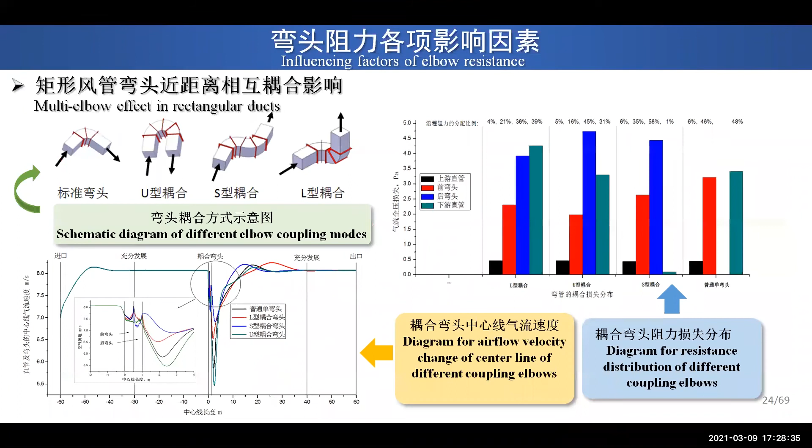Now for elbow resistance, different connections - the multi-elbow effect - different connections will have a direct influence on the resistance. Here is the example of the coupled elbows.

The problem is how to optimize the shape of the elbows. We can change the different shapes, such as the elbow arc.

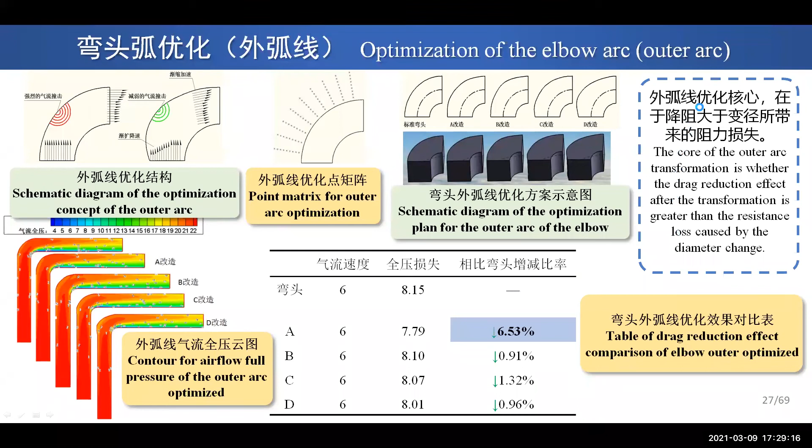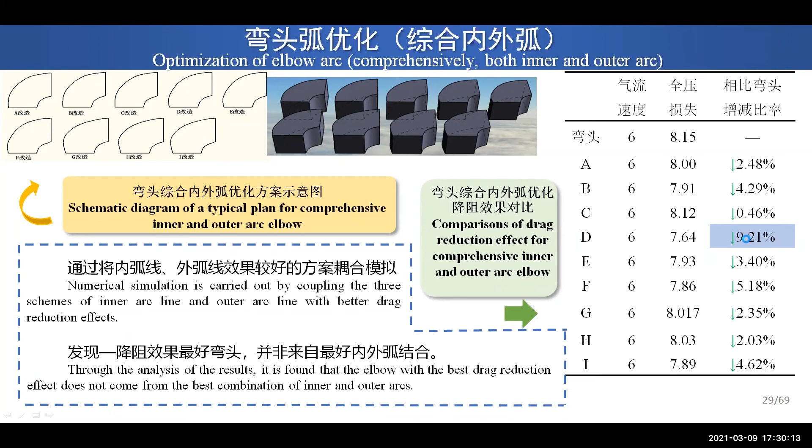We can also use the extended airfoil. If the airfoil is extended, then resistance can be reduced by as much as 15%.

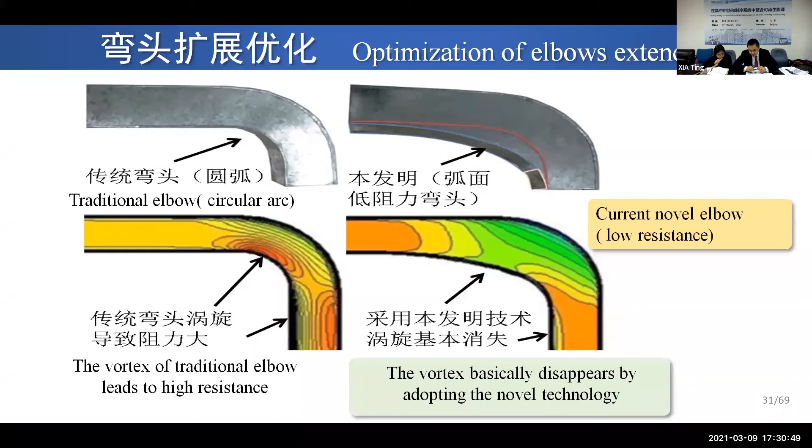This picture, to save time, shows current airfoils. These are low resistance airfoils. These are the shapes.

The airfoil optimizes the curved shapes. According to this shape, we can reduce the energy. This is a turning vane optimization.

This is the cost analysis. A comprehensive cost analysis shows the optimized airfoil cost is approximately equivalent to the traditional ones.

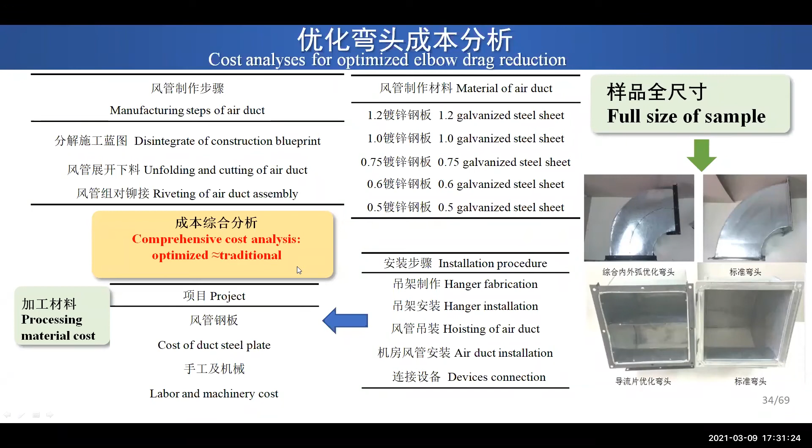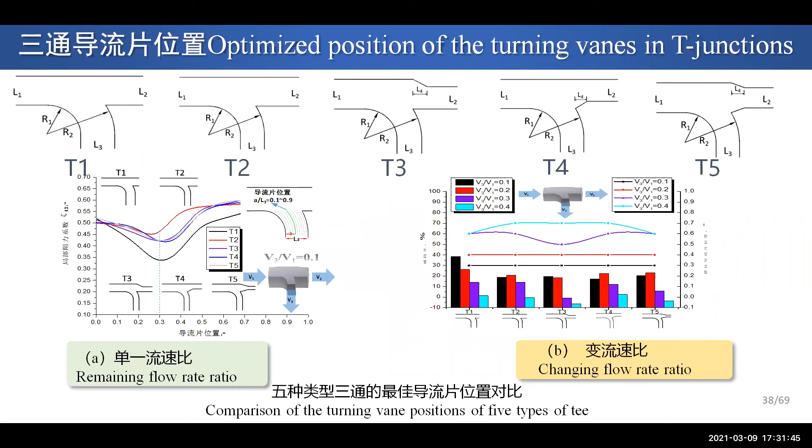These are optimized shapes for airfoils. This is the turning vane for drag reduction. Look at the T-junction. This is the optimized position and shape for the T-junction.

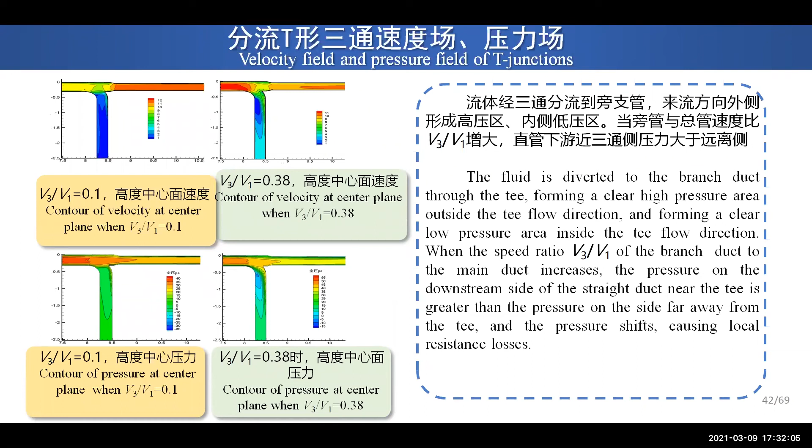This is the air velocity contour, showing how to reduce the resistance. By different ways, we can reduce the resistance in the T-junction. Both the T-junction and elbows can have their resistance reduced.

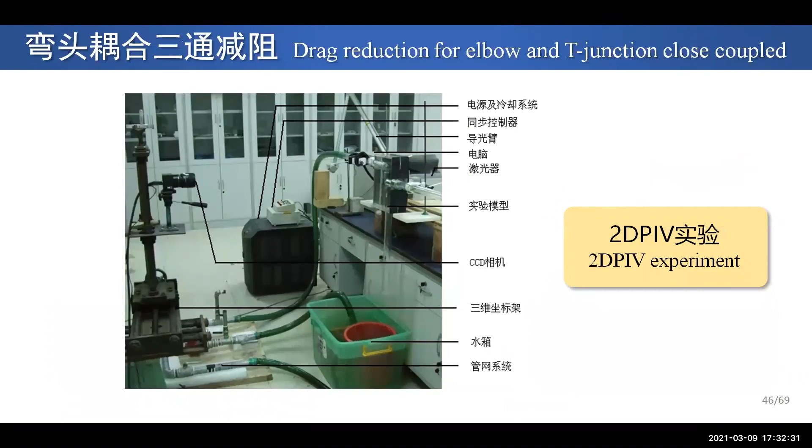That's a kind of experimental test. There is a two-dimensional PIV experiment. These are comparisons of the PIV test and the CFD modeling.

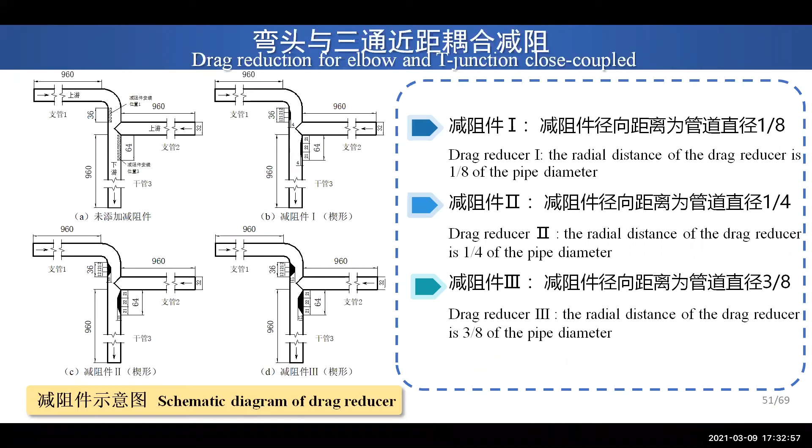These are the different connecting types, the different drag reduction shapes for the T-junction. The drag reducer is different. This is the optimized shape, the structure for the drag reducer.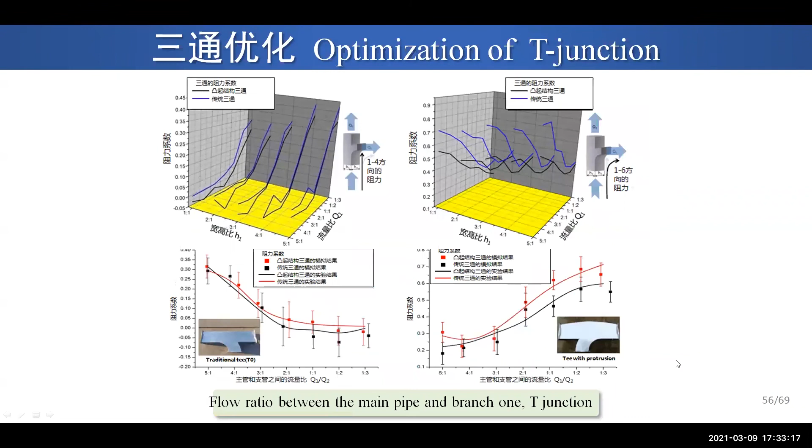The drag reducer for the convex structures is as follows. For example, we can change the shape, the arc of the traditional junction, to a new, narrower one. This is some outcome of the narrow T-junctions, airfoils, and so on.

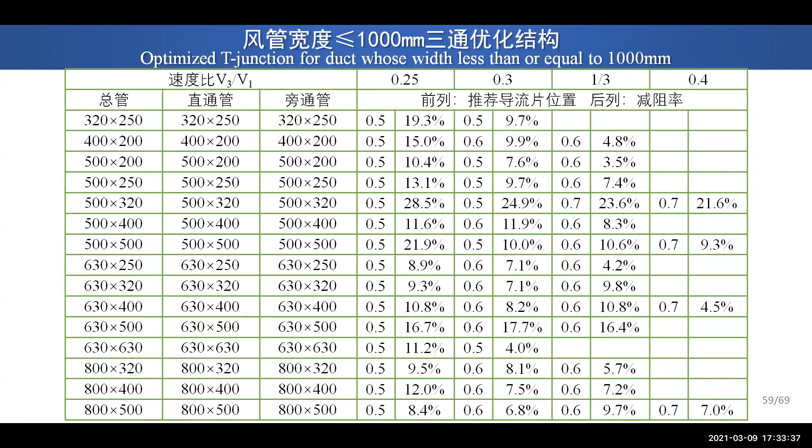That is a narrow component with quite low resistance. Here you can see some of the components. We have tested these for many years.

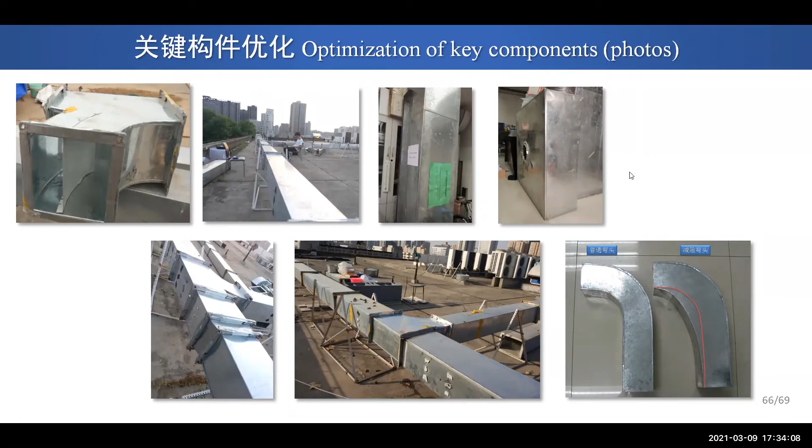I would like to point out again that local drag resistance is very important. It occupies and contributes a lot to the energy consumption for building energy efficiency. So the local resistance of key components of heating, ventilation, and air conditioning systems can be reduced by more than 10% through proper but simple optimization. A novel method has been proposed to reduce the resistance and energy consumption for heating, ventilation, and air conditioning systems.

That's the main point of the introduction and the presentation. Thank you. We have about 3 more minutes.